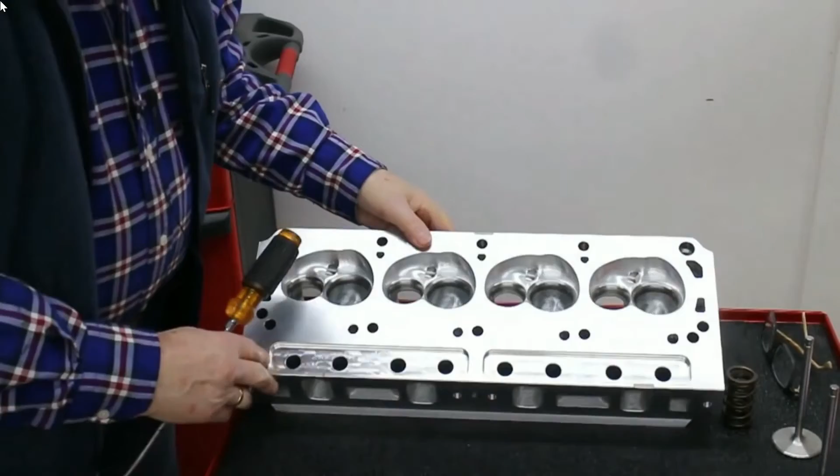Well, let's get into that, because this head turns out to be something a little more special than you might think. First, let's take a look at the basic cylinder head stripped of its hardware. We can see from this that it's a fully CNC ported head.

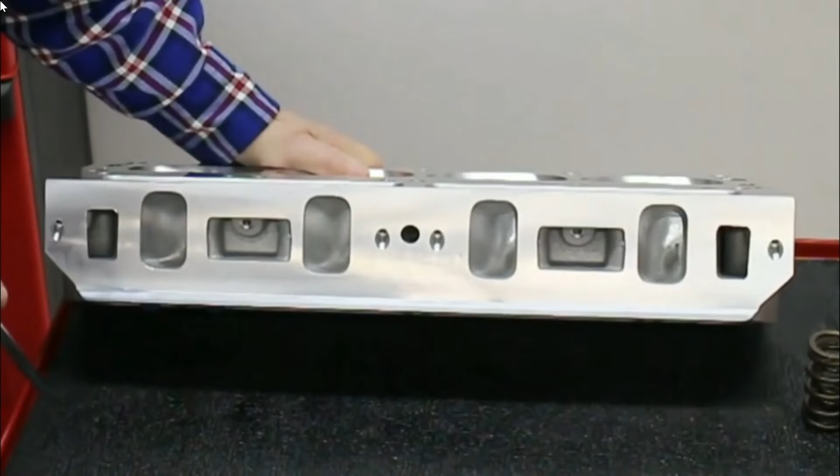Now, you may look inside the ports and think, well, that's a bit of a coarse finish there. Can they truly justify that? I don't know if you can see it here, but you can probably hear the screwdriver going over it. I have cleaned up some of these heads to just make the finish an emery roll finish, and two things are evident. One, it has almost no effect on the flow—I'm talking about just a surface finish change here, not a shape change. And two, it has no effect on the horsepower either. I think, or I'm sure, if you actually polish those ports, you'd probably lose a bit of power. My guess is these ridges, in some way, act like not-so-good golf ball dimples. In other words, they're better than a flat port, but not quite as good as a golf ball finish, and that finish is very expensive to do. Anyway, there we go.

165cc intake port, 70cc exhaust, 1.9 inch intake valve, 1.6 exhaust. The valves are very good here. Let me show you—they are a lightweight design, flat back, because that's what the port likes. But the best virtue is their 5/16 stem, or 8mm. As such, they are very light. We'll get into that in a moment, I'll show you the weight difference. And here's the exhaust, tulip shaped on the back, and this is usually a form that works well. Nice radius on the front there.

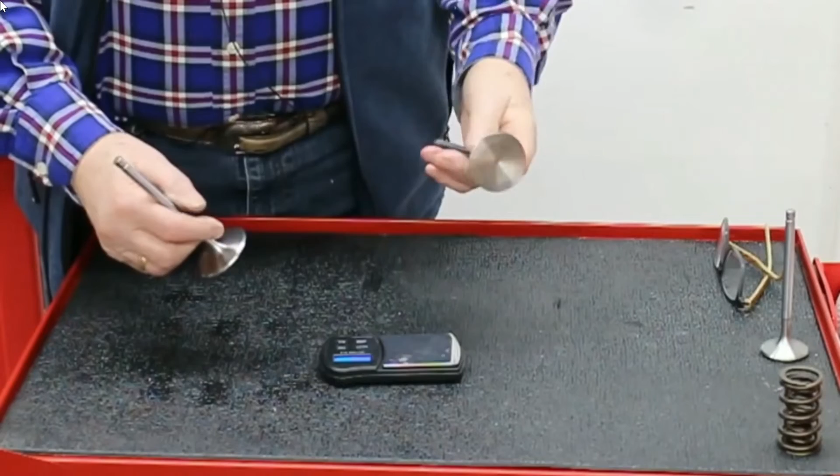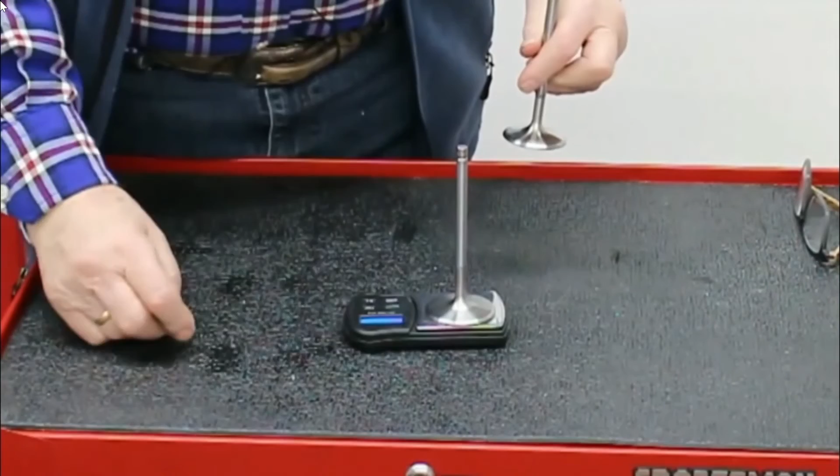And we are going to test with 2 intake manifolds: one, an Edelbrock RPM air gap performer, which is a very good manifold for heads like this; and two, a triple 2-barrel carburetor manifold, which at first glance looks like nothing is going to flow very well through there. But my partner in crime on this project, Jack Sane at Walters Engines, has ported this manifold extensively, so it does flow pretty well. It flows well enough for us to make a useful comparison between the effectiveness of that intake and the RPM performer air gap, which flows pretty good right out of the box.

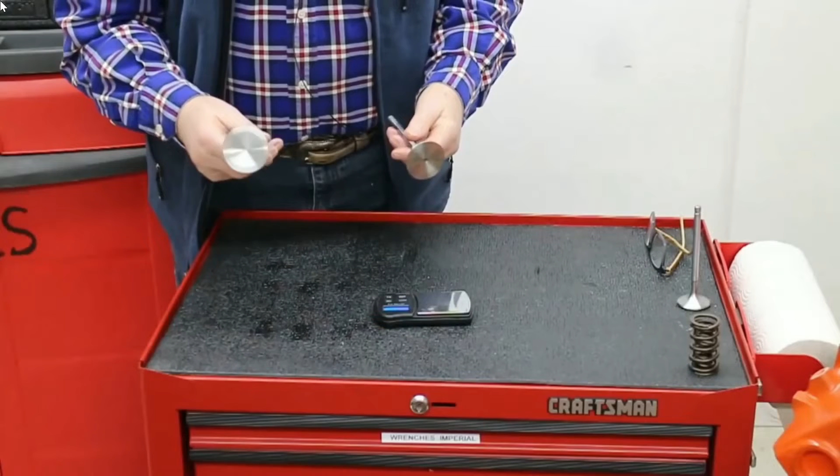So let's take a look at the valve weight. Here's our lightweight 5/16 stem valve, and here's a regular valve. It's around 12 grams lighter. Basically our AFR valve, at just on 100 grams, is 10 to 12% lighter than its regular 343, or 11/32 stem counterpart. It's probably hard to see the difference there, but so what are AFR's lightweight valves worth? Anything? Yes.

The reduction in valve weight, plus the fact that they come with light steel retainers on these heads, means the valve train, the valve mass, replicates having titanium retainers instead of steel retainers. A good steel setup saves you the cost of a set of titanium retainers for a regular size stem valve. Having lightweight valves is a good approach to making a healthy valve train.

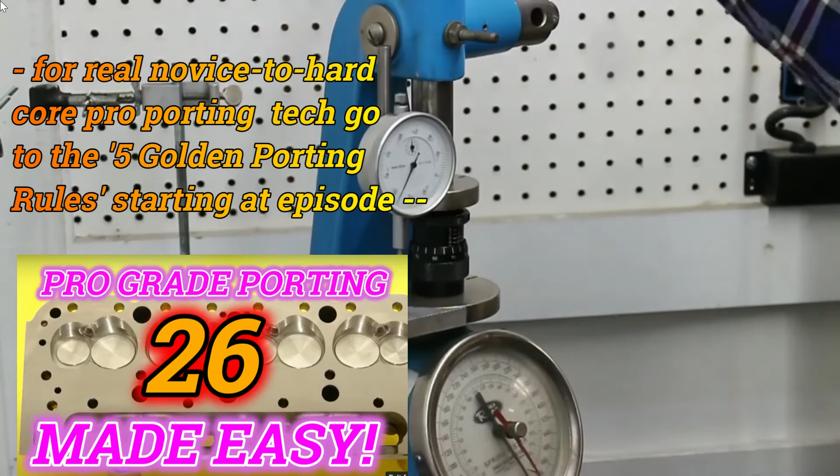It's actually an advantage that the cylinder head manufacturer could exploit by using a slightly lesser quality of spring, but AFR did not choose that route. As usual, their hardware is very good, and the choice of spring they've made has been a very considered one. So I want to look at that spring in detail now, so you'll see this hardware business isn't just something I'm glibly talking about—it's actually applied in practice.

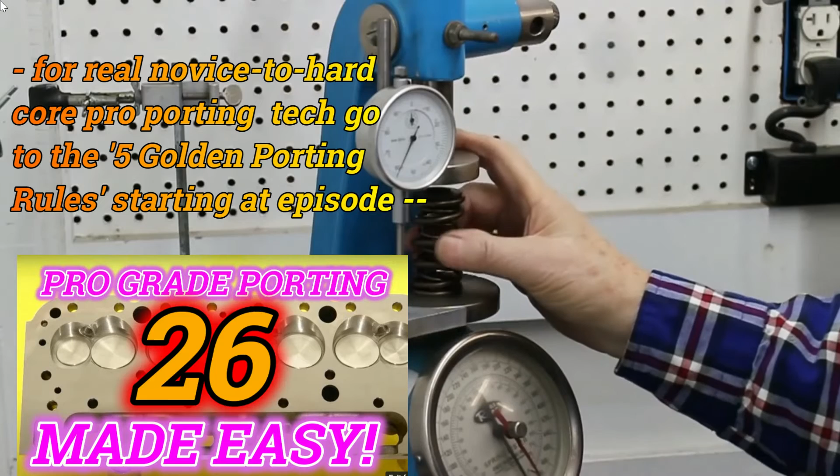First thing, let's take a look at the installed height of the springs and work from there. Let's set the installed height first. Right, let's put that to zero. Got that. Now let's put our spring and retainer in and see what that is.

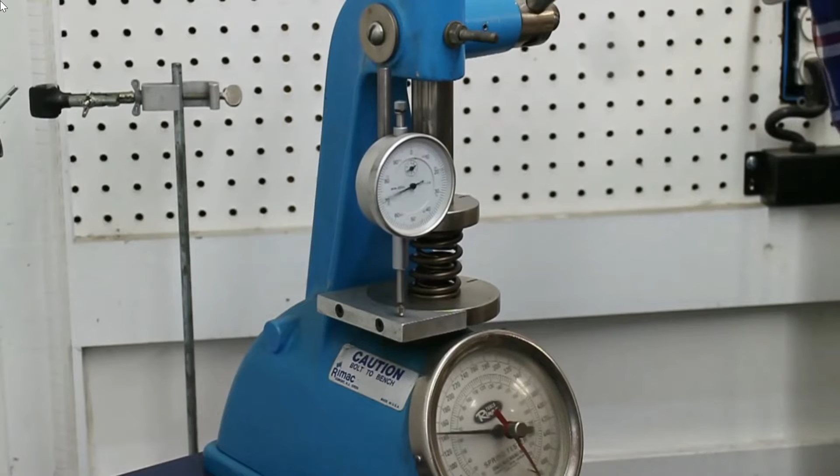130 on the seat. Right, now let's see what it is over the nose for a 600 lift at the valve. The spring's capable of 650, but let's leave a little margin here and check it at 600. That's the most likely maximum lift we'll use on a 302, a 331, or even a 347 for the street. Right, let's go around.

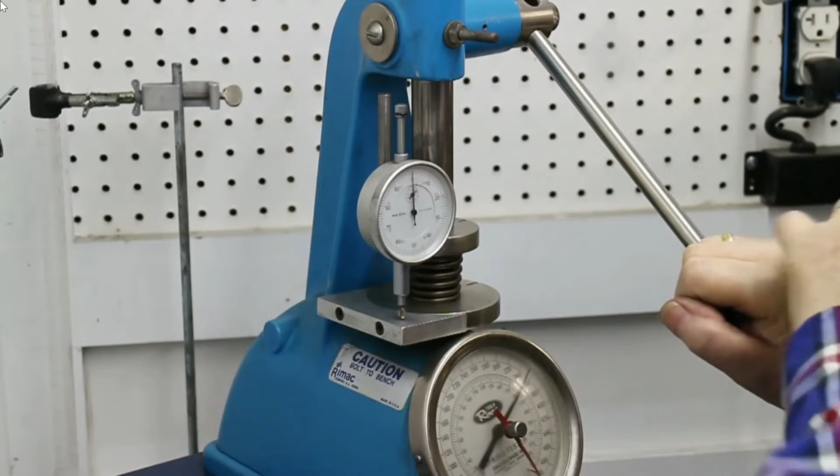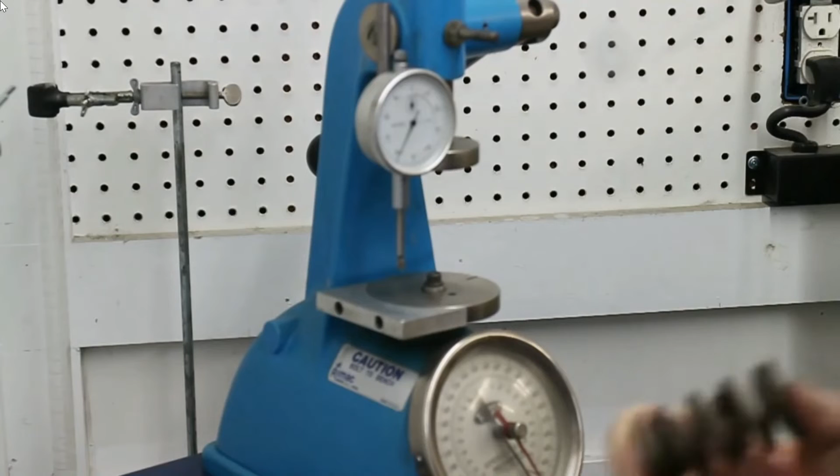Let's do that again. 1, 2, 3, 4, 5, 600. It is 350 pounds over the nose.

Right, I already checked the spring rate, and that's sitting right at 360 pounds. So with its weight and its stiffness, this is a very good spring.

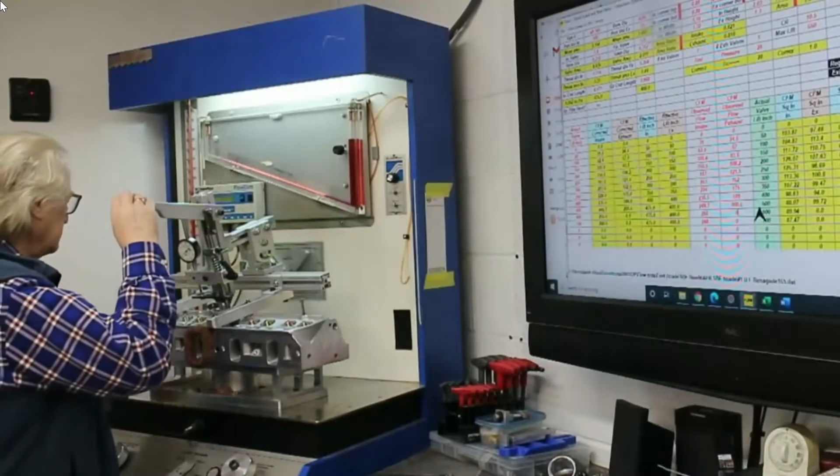Well, we've looked at the spring and the valve, right? The only other thing I need mention here is that the rocker studs are high quality, and the guide plates are adjustable ones, not fixed ones, so it allows you to set your push rods up pretty much spot on. No, that's not length, that's pitch this way.

Right, next move, let's put this to the test on the flow bench and see where we get to.

Well, there we go. That's finalized our tests and we're looking good. Basically, it looks like the AFR 165 Renegade heads are living up to expectations, and maybe a shade over that, so that's good. I've just got all the testing done. Next step, we'll go into some of the details on what it does.

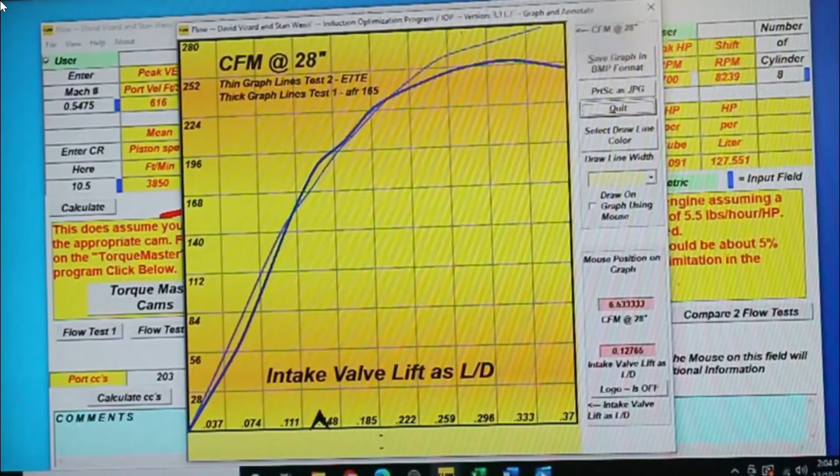Well, the thick line here is our 165cc port AFR Renegade head with the 1.9 inch valve. This, the thin line, is my E7TE head with a 2.02/1.6 valve combination, with a trick valve seat and all this good stuff on there, and a lot of porting—it was very strong on the dyno. You can see right up until this range here that the AFR head shows itself very well, considering it has a much smaller port and a much smaller valve.

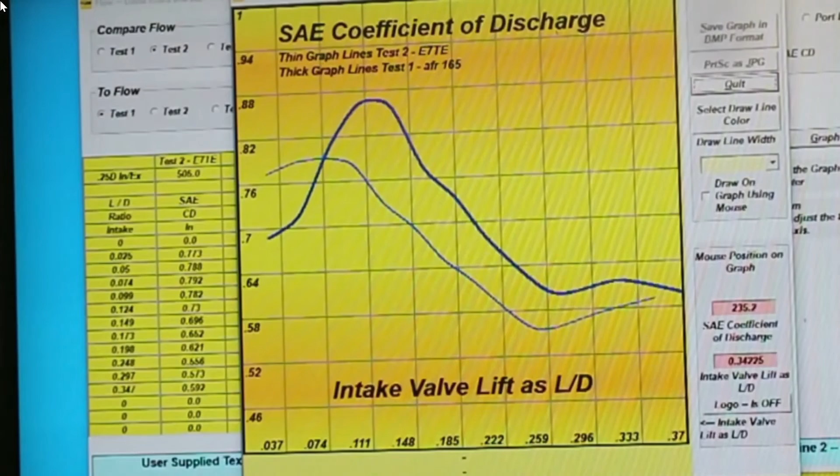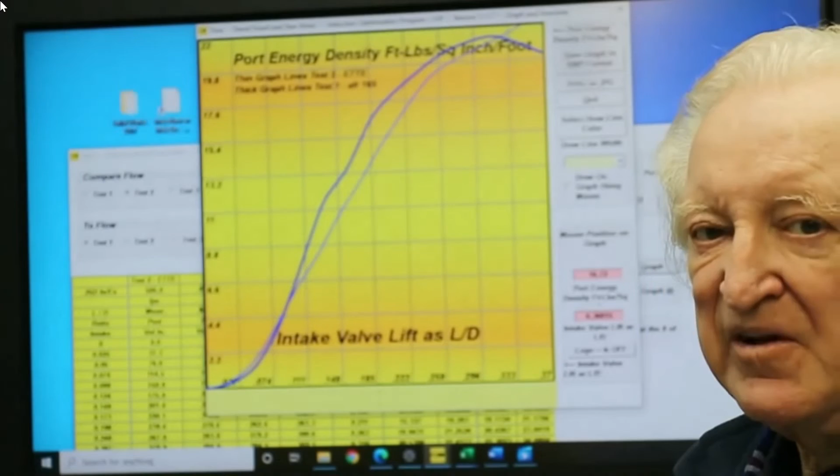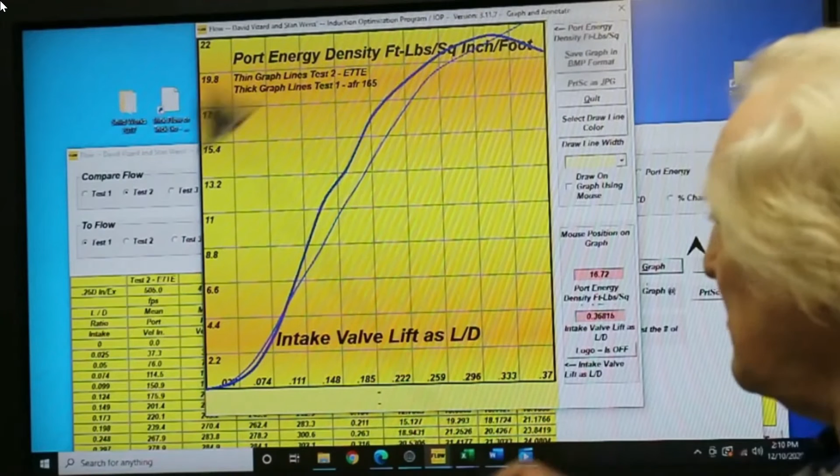So our comparison is a little more fair—instead of comparing them outright, let's look at the flow efficiency, because remember, we're talking about a small valve head versus a big valve head. Here we go: the thick line is the AFR intake valve efficiency, and the thin line is my E7TE head with the 202 valve. You can see up here we're hitting something like 87% efficient on the AFR head. I can tell you now, this is the highest valve flow efficiency at this lift of any aftermarket head I have tried, and that includes at least half of them out there.

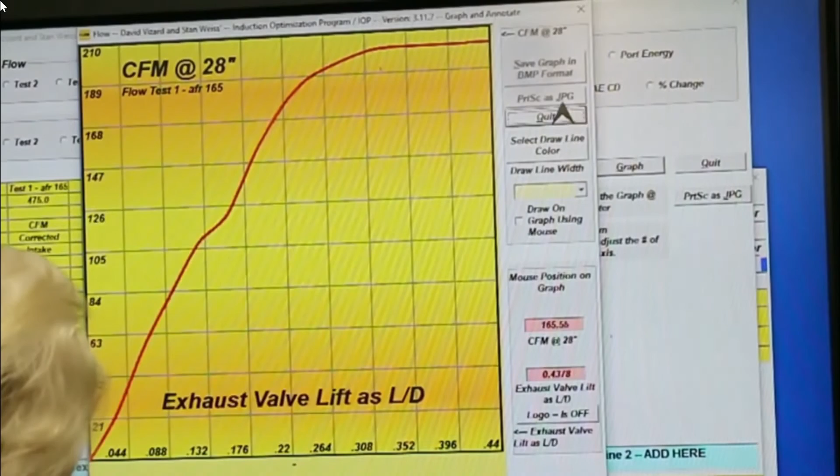So one reason we can expect good performance is that this valve at low and medium lift looks a lot bigger. What does a typical aftermarket head have? At this lift it's nearer about 72%—down here. My iron heads typically are in the 80% range at this. So this is good—better than anything you can buy except for this. Major points for the cylinder head here—very stout throughout.

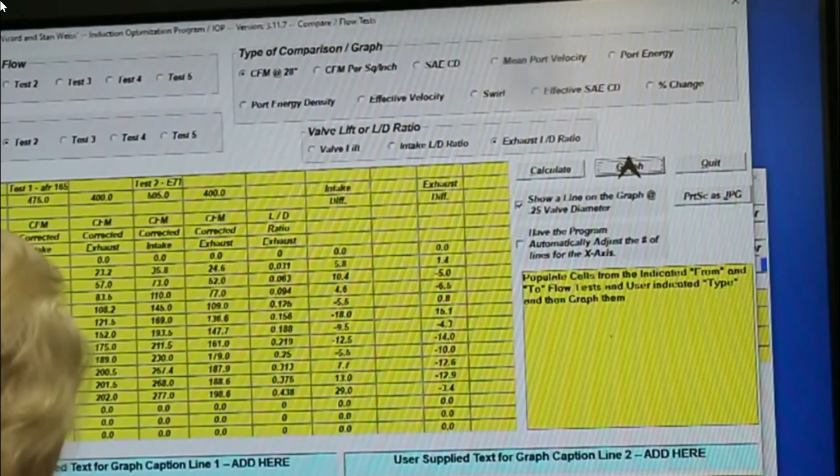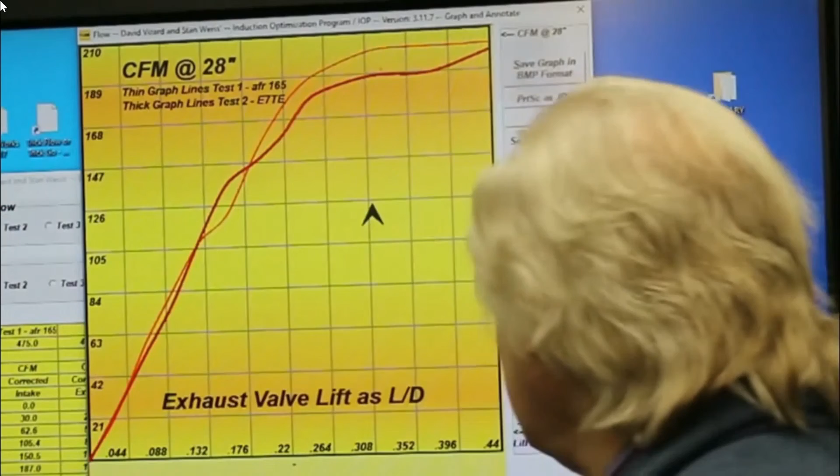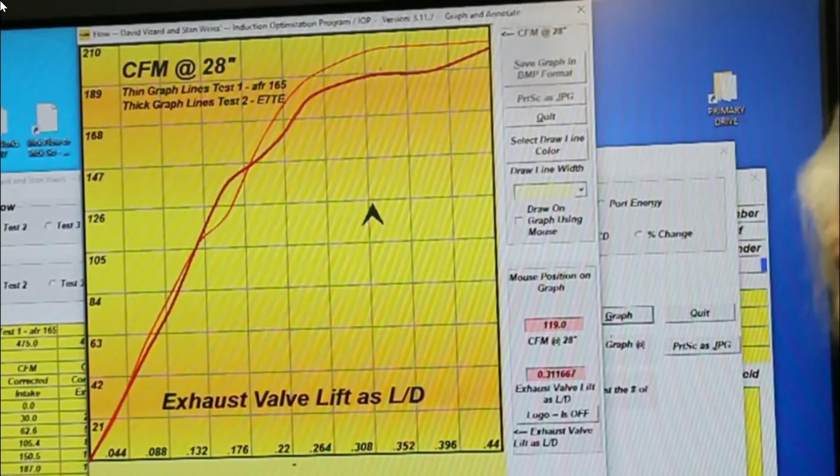Now let's look at something that isn't very often talked about, but if you're going to get serious about your cylinder head porting, you have to get into the science of it. This graph here is the port energy density in foot-pounds per square inch per foot, and it virtually dictates the success of a cylinder head in terms of its output. We can look at these numbers and say that anything going over about 20 foot-pounds per square inch of valve per foot length of port is going to make big horsepower.

Well, look at this—we're up around 21.5 there, and remember, this cylinder head produced some really stout figures. On our 10.5 to 1 motor, it cranked out 1.395 foot-pounds per cube. Check that against other cylinder heads and you'll see that's a lot better than most do, and that's a modified iron head. What we've got here is AFR's not overly expensive 165 Renegade head, and it betters that. So I'm expecting great things from this on the dyno.

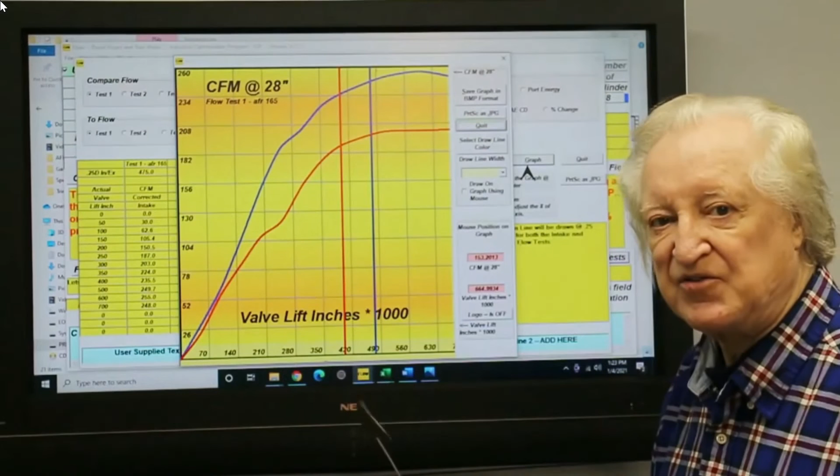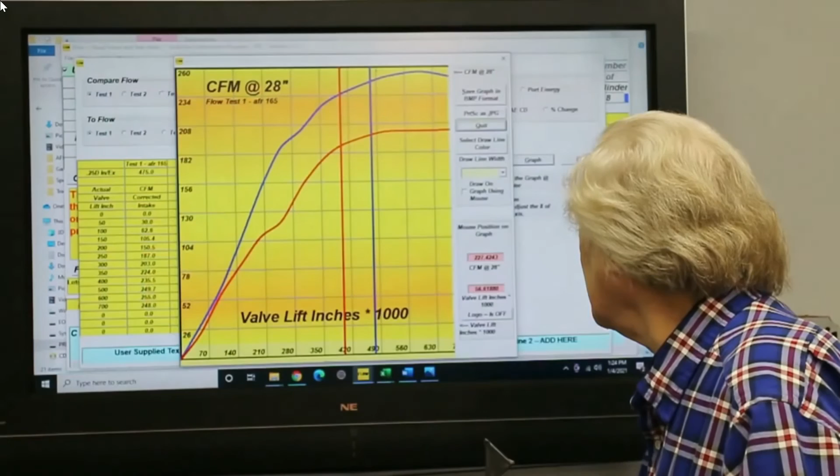Exhaust was pretty strong, right? You can see it's approaching 200 CFM and hovers around 201, 202 CFM for quite a bit up here. So we've got a good exhaust port as well. With a 1.6 valve, there's no reason it shouldn't be good, and at least compare with other heads. So let's look at it compared with my head with a 1.6 valve—my iron head. Now let's go to there. Now let's go do it the other way around.

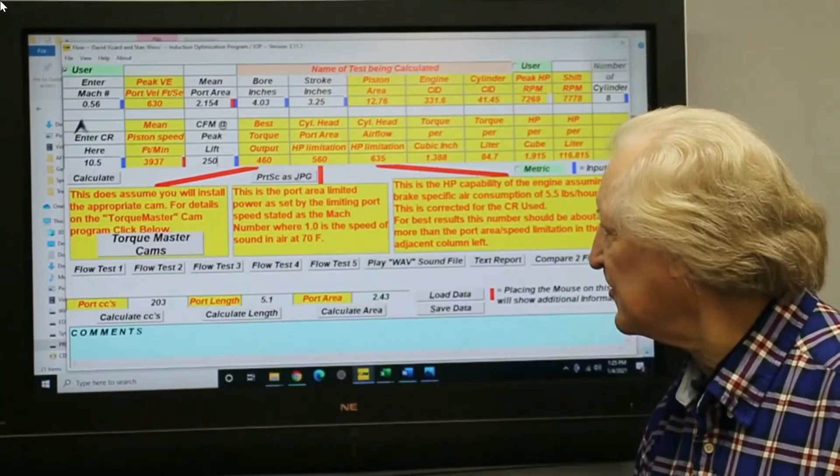Now I have to tell you, with these E7TE heads, you can get a good port if you know what you're doing. It takes quite a bit of skill, but it can be done. So what we have here is an exhaust port which falls into the category of pretty damn good. Maybe could be a little bit better, but really it's well balanced with whatever the intake is.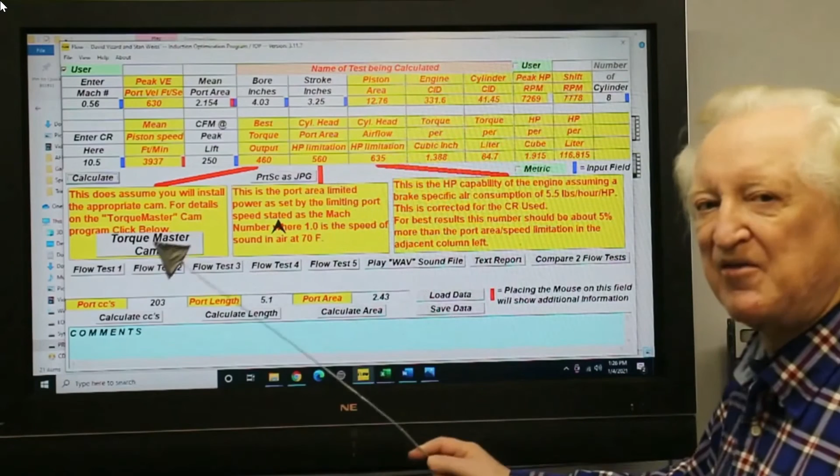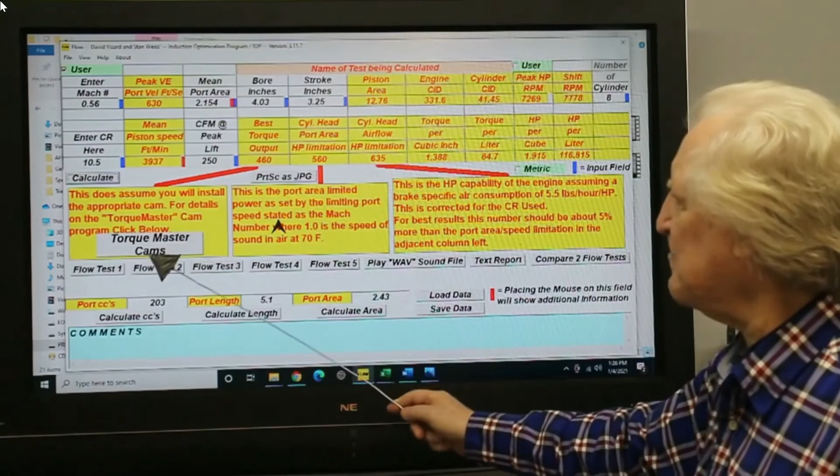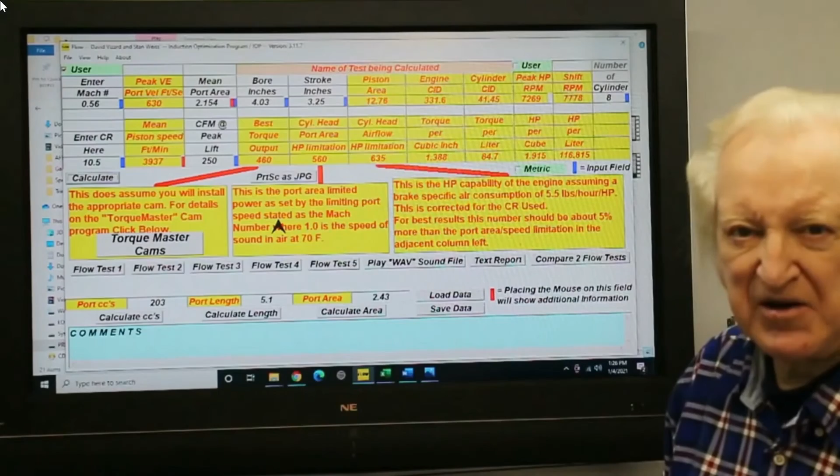AFR's Renegade heads have good flow numbers, good port velocity, a very fat flow curve from efficient valves, and one thing that doesn't show up here - they're very insensitive to octane rating. In other words, with a well-built engine, they'll run 10.5 to 11 to 1 on 87 octane fuel. Now that doesn't come about easy. The heads are capable, but you have to be a capable engine builder to extract that.

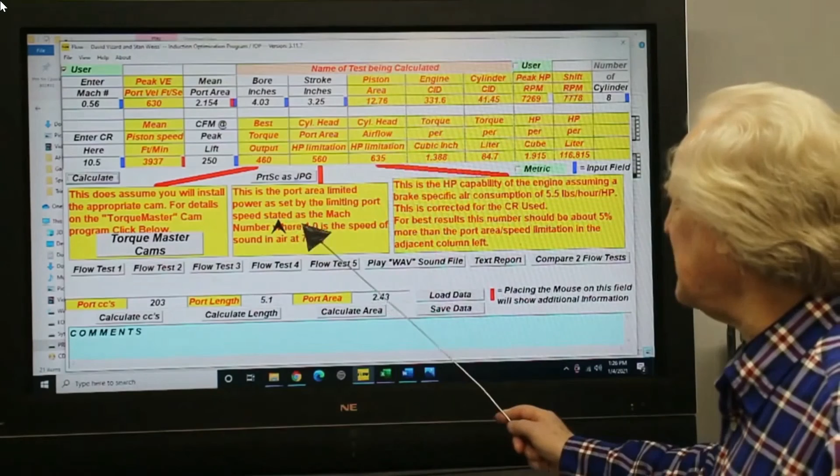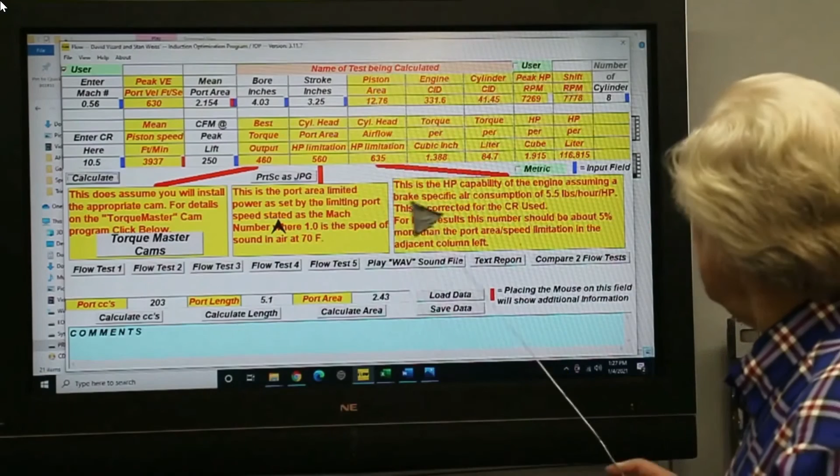But let's look at this. Here's our flow figures, right? But they don't tell us exactly how much horsepower we're going to get. Now, this is where we could get into something like a simple dyno test to show it. But here's the problem with comparative dyno tests, testing stock versus the modified one - they may require different camshafts for optimum use. So the IOP program goes through countless, thousands of calculations to calculate what the potential horsepower is, and it's very accurate.

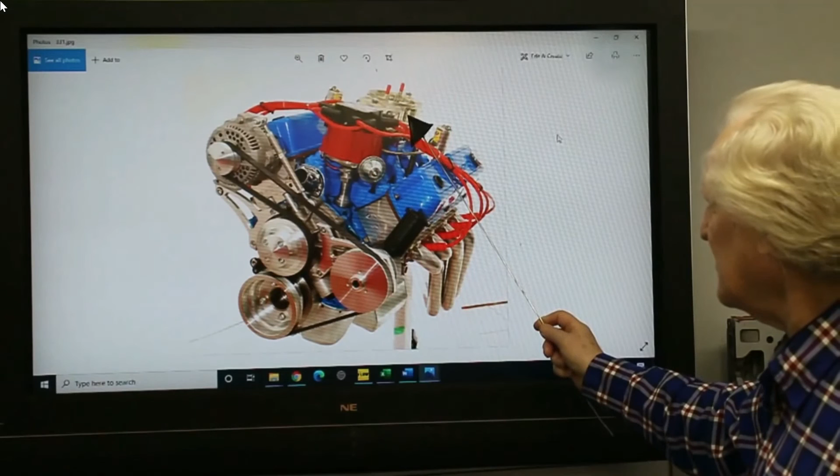Let me show you here. Right, so let's go to here, quit, go to this, here - and what I've done here is I've put in the port area, the flow at the lift we're going to use, which would be about 580 lift. I've put in the bore, stroke, the compression ratio, and the limiting Mach number of the head. I happen to know what that is, but this program will calculate it for you pretty close.

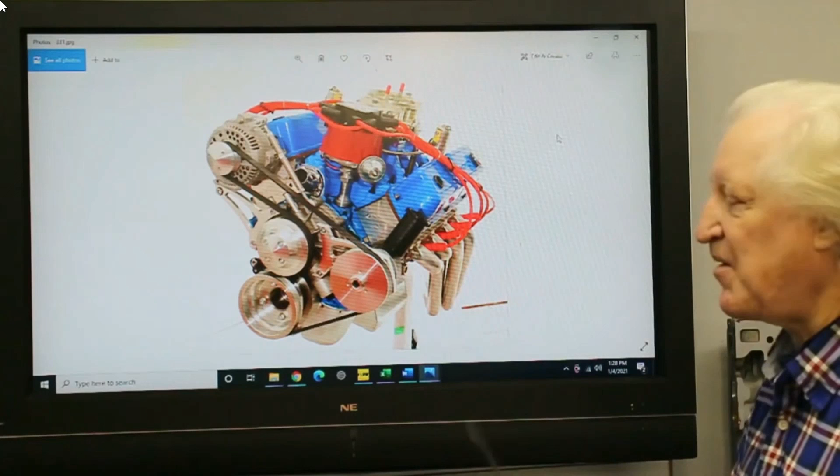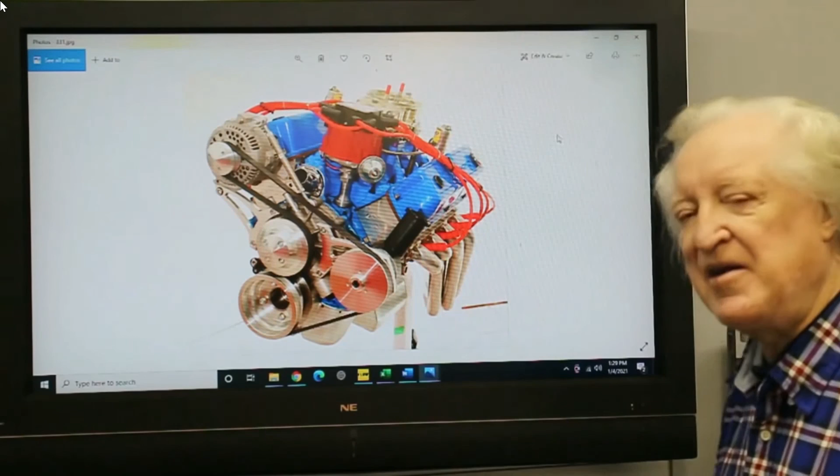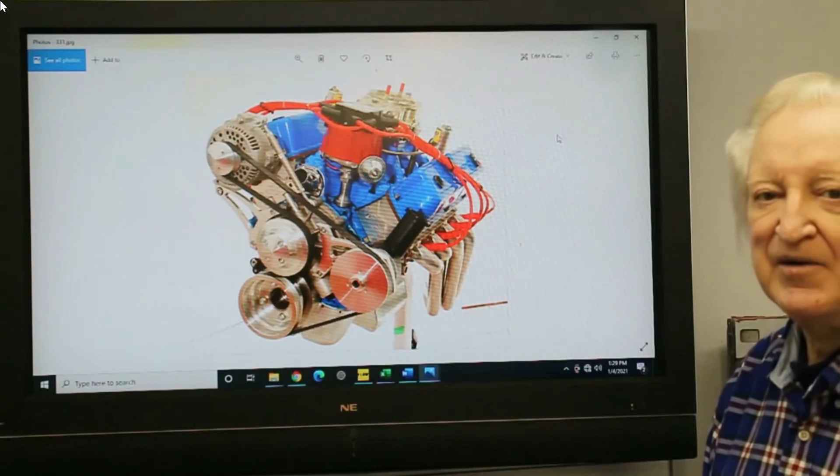Now, let's actually look and see what a real engine did. This engine here was one that I did some years ago. You'll see the AFR - well, you may not be able to, but if you've got a copy of my book when it comes out, you'll see the AFR logos on here. It's a 331, 10.5 to 1 motor, right?

It had a Super Victor intake manifold, single plane, a Holley HP carburetor - I think that was about a 750. The HEI distributor on this was from Performance Distributors, right? It's a GM distributor adapted to a Ford. Works very well. Now then, tested at Terry Walters Engines.

What did we get for power? We got 561 horsepower and 461 foot-pounds of torque - only 1 horsepower and 1 foot-pound different from the predicted. Now, okay, showing off here - that is a bit closer than we normally see, but this program is very accurate in determining what the head's capable of. So if you can build your engine right, you will get very close to these predicted numbers.